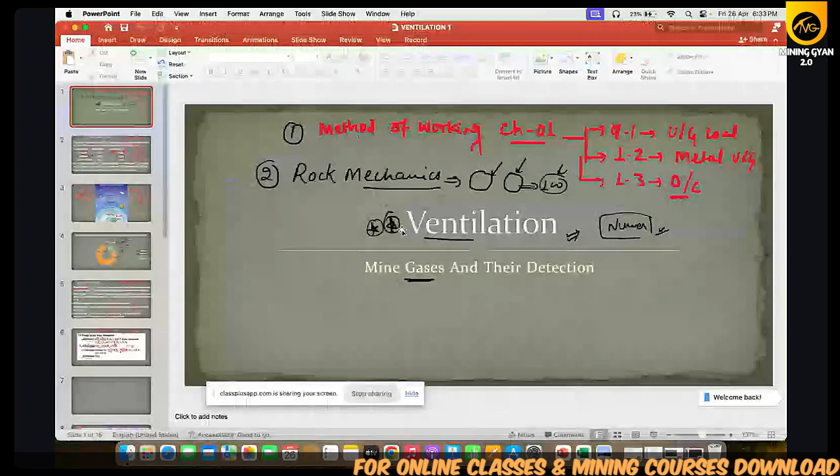So yesterday we were discussing. We have started the mine ventilation, and we have discussed the atmospheric oxygen, nitrogen, and carbon dioxide percentage in the environment. Then we have seen the layers of the atmosphere, which is the troposphere, stratosphere, mesosphere, thermosphere, and exosphere. Then we have discussed the black damp, fire damp, white damp, stink damp, and after damp.

So for white damp, that means CO. Stink damp means H2S. Fire damp means the percentage of CH4 will be more. Black damp is also known as the choke damp. The percentage which is important: fire damp percentage of CH4 will be 80 to 96%, and N2 is 10 to 20%. Black damp N2 percentage is 87 and CO2 is 13%. After damp N2 is 44 to 58 and residual is 30 to 50.

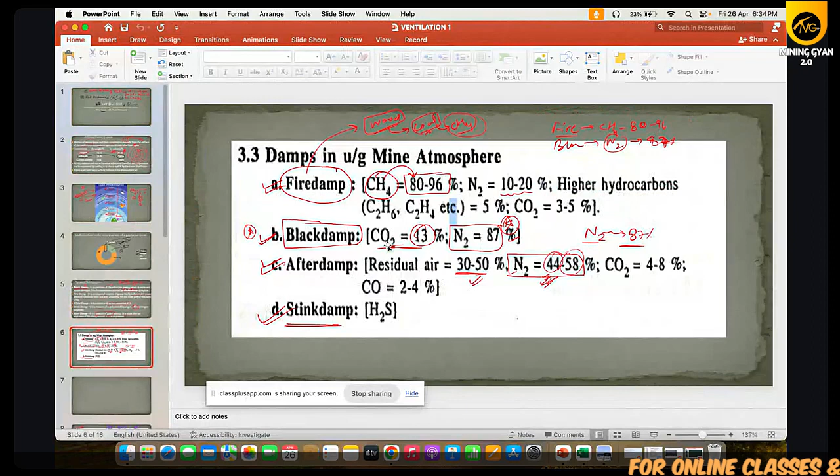Stink damp is H2S. Then we have seen whatever permissible concentration of different gases in Indian underground mines, CH4, we have discussed that in the general body, the percentage of CH4 is 0.75. And in any part of the mines, it will be lesser than 1.25%.

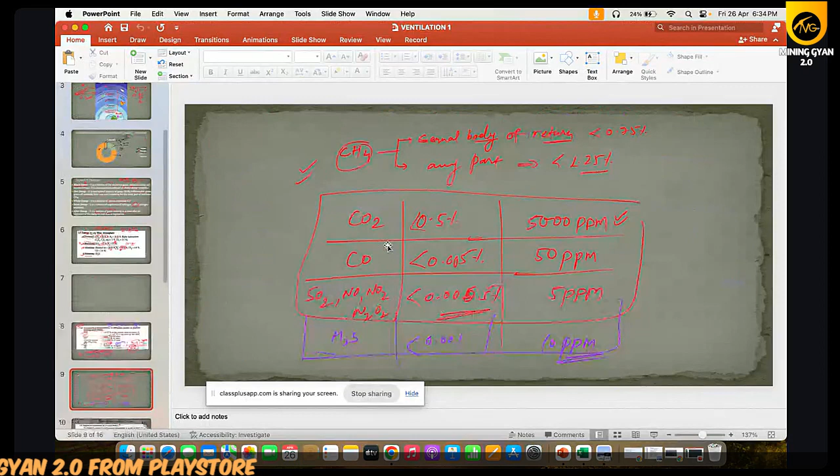CH4, CO, and NO2, N2O4, and SO2, we have seen various permissible percentages. CO2 5000 ppm, CO 50 ppm, SO2, NO2, N2O4 we have seen 5 ppm, and H2S will be 10 ppm. This is the permissible limit in the underground mines.

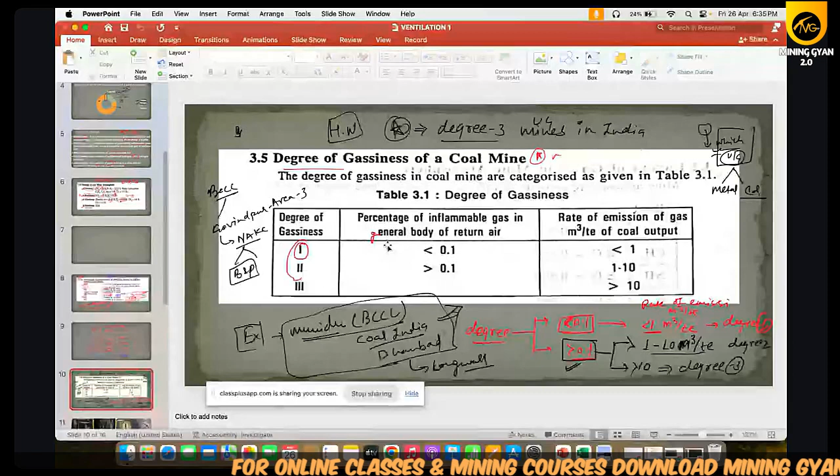Then we have seen the degree of gasiness: degree 1, degree 2, degree 3. We have divided on the basis of percentage of inflammable gas in the general body. If it is less than 0.1 and the rate of emission is also less than 1, then we call it degree 1. Or if the percentage of inflammable gas in the general body of the return is more than 0.1, then we divide into two types, degree 2 and degree 3.

We call it degree 2 when the rate of emission is 1 to 10. And if the percentage of inflammable gas in general body is more than 0.1, but the rate of emission is more than 10, then we call it degree 3.

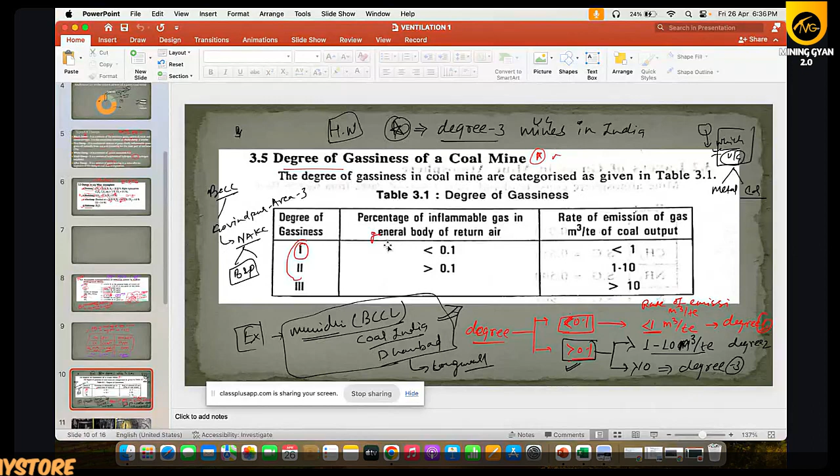Then we have seen PV equal to nRT. If T is constant, or temperature is constant, we call it Boyle's law. In other terms, P is inversely proportional to volume. Or in Charles's law, we consider pressure is constant. So volume is directly proportional to temperature, that means V1 by T1 equal to V2 by T2.

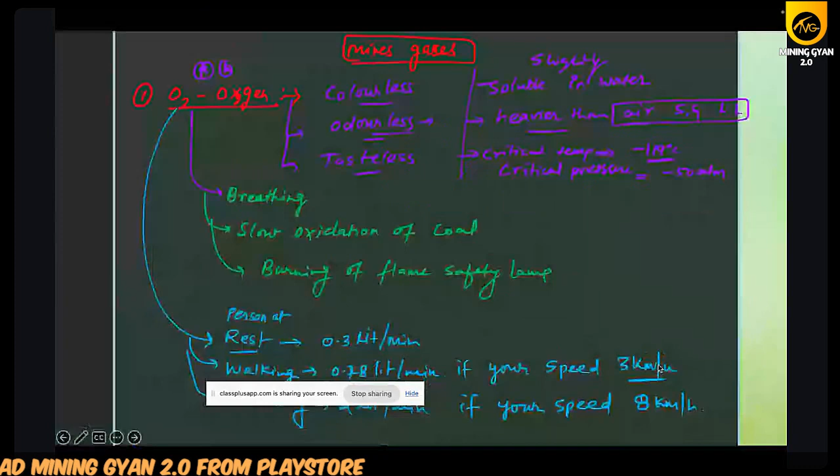Then we have started that there are various types of gas. I thought I should discuss a little bit about these gases, because in AK Gorai they have mentioned only the names. So I thought I will give you some basic idea in a little more detail, so that if any theory question comes based on gas, you are able to solve that question also.

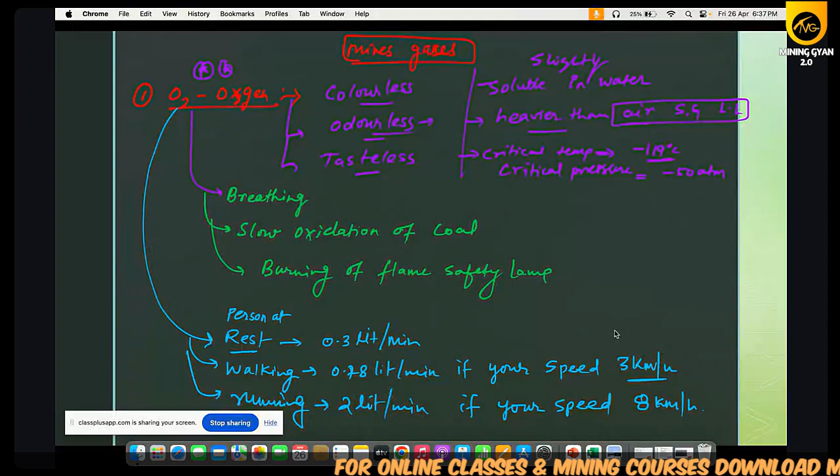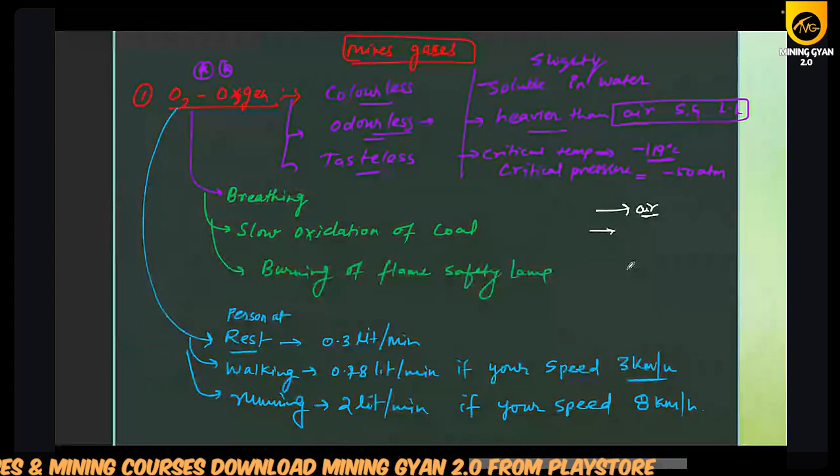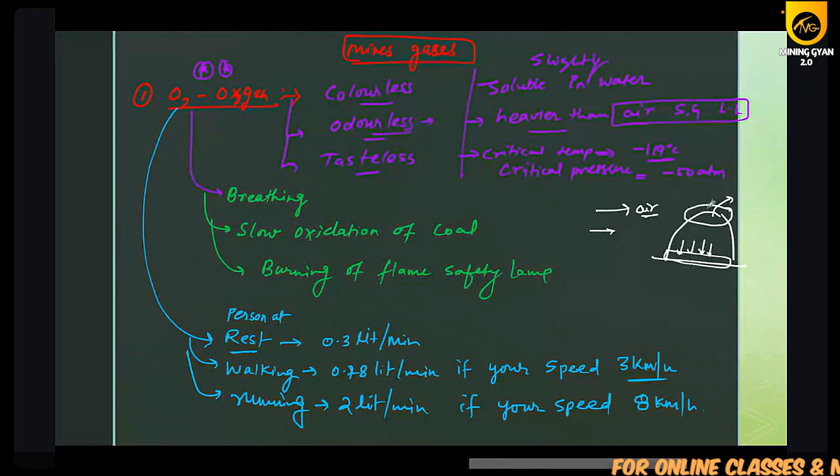So oxygen, we have seen that oxygen is colorless, odorless, tasteless. It is partially soluble in water, and has higher density than the air. Higher than the air means, if you see in the atmosphere, air is here, O2 will be below, heavier than air. So if this is your heading, heavier gases will be found near your floor, and lighter gases will be found on the top, on the roof. So CH4 you will find on the roof side because it is lighter than air.

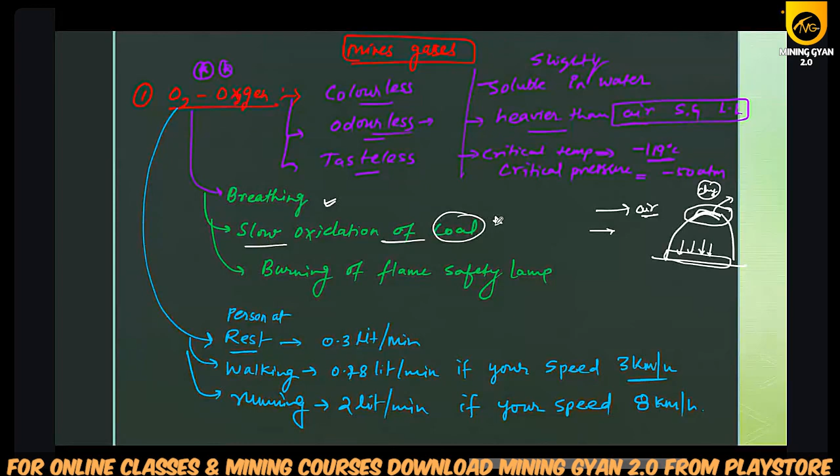So O2 we use for breathing, and it's also important for the slow oxidation of coal, and burning of the flame safety lamp. Then we have seen, if a person is at rest, he needs only 0.3 liter per minute. But if he is walking, then he needs 0.78 liter per minute. And if he is running, then he will need 2 liters per minute.

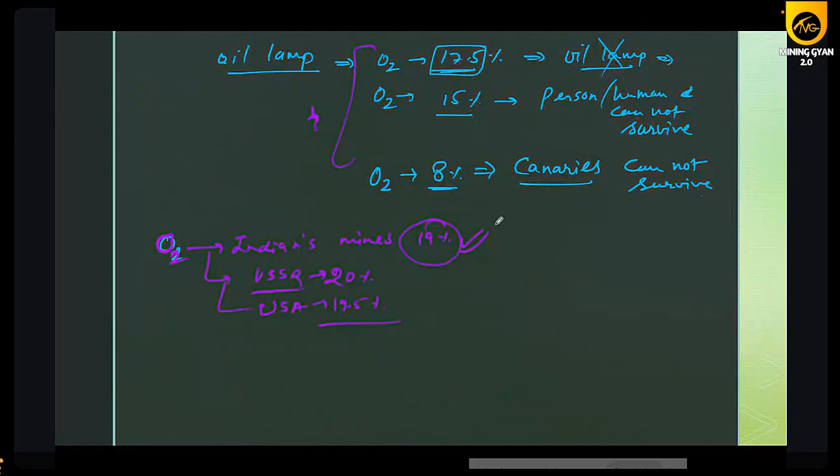Then we have seen the oil lamps. If the oxygen level is 17.5%, the oil lamp will be shut off. If the oxygen level decreases to 15%, a person cannot survive. And if the oxygen level reaches 8%, a canary bird cannot survive.

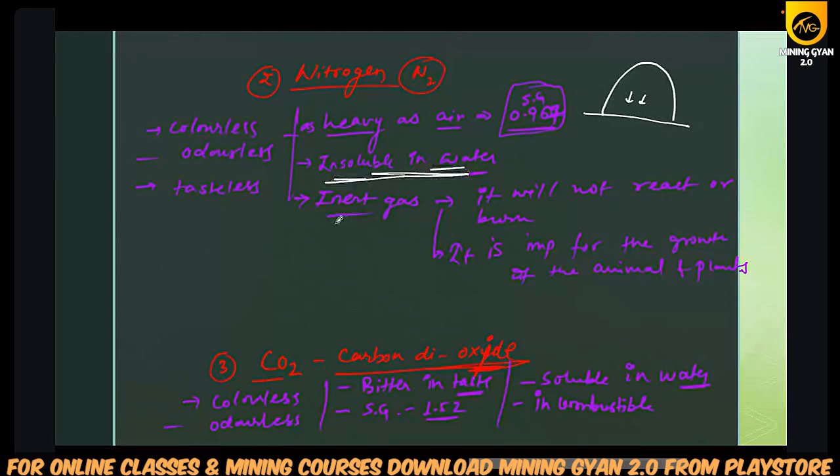Then we have seen nitrogen. Nitrogen is colorless, odorless, tasteless, and as heavy as air. That means you will find it in the bottom side, not on the top side, in your heading. It is insoluble in water. It is an inert gas, meaning it will not react or burn. It is important for the growth of plants and animals.

Then we have seen carbon dioxide. Carbon dioxide is colorless, odorless, but it has a taste, a bitter taste. Its specific gravity is 1.52, that means heavier than air, and it is soluble in water. So please remember that.

CO2 is produced due to breathing of man, burning of flame safety lamp, decay of timber, slow oxidation of coal, and diesel locomotives. So during breathing, when you inhale you take in oxygen, and when you exhale you release CO2.

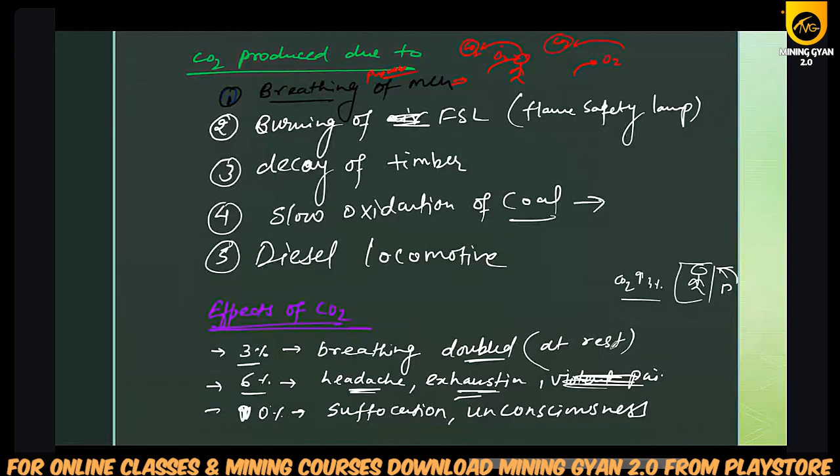Effect of CO2: if the CO2 percentage is 3%, you will breathe faster, meaning breathing doubles at rest. If the percentage increases to 6%, you will feel headache and exhausted. If it further increases to 10%, there will be suffocation and unconsciousness. And if it increases to 25%, you will die within 1 hour.

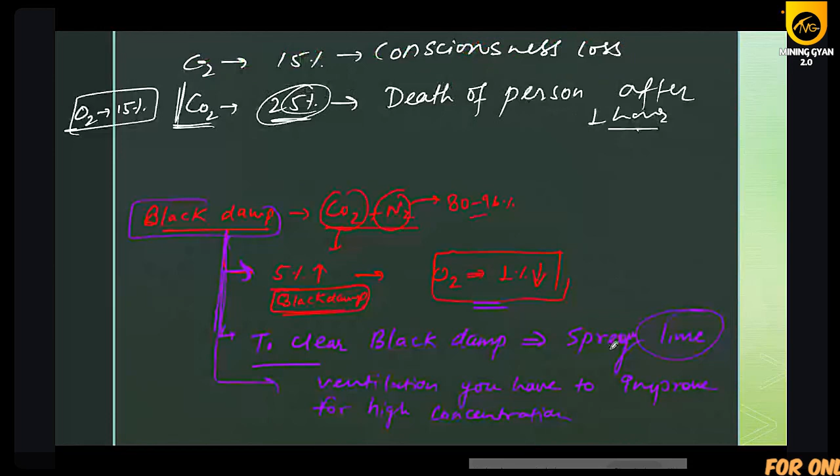Then we have seen details of black damp. Black damp is made up of CO2 and N2, and to clear the black damp, you have to spray lime and improve your ventilation.

Then we have seen carbon monoxide. We call carbon monoxide the white damp. Remember that fact. It is colorless, odorless, tasteless. Its specific gravity is nearly that of air, and it is hardly soluble in water. It burns with a light blue flame.

CO is produced due to oxidation of coal, explosives in underground mines, spontaneous combustion, and methane.

Physiological effects: at 0.02% there is headache, discomfort, and collapse after 45 minutes. If the percentage increases to 0.12%, heartbeat will increase. If it increases to 0.2%, the person will become unconscious. At 0.5%, death of the person occurs.

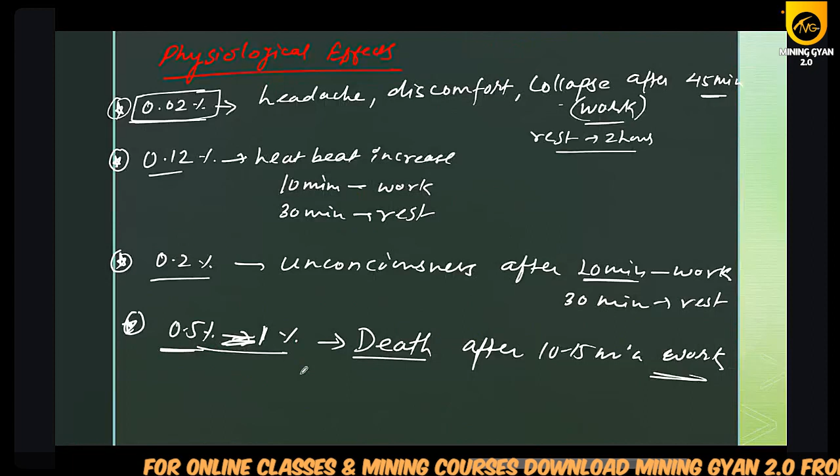Canary bird - till now we have discussed up to this information. If you have any doubt till now, please comment, otherwise we will start.

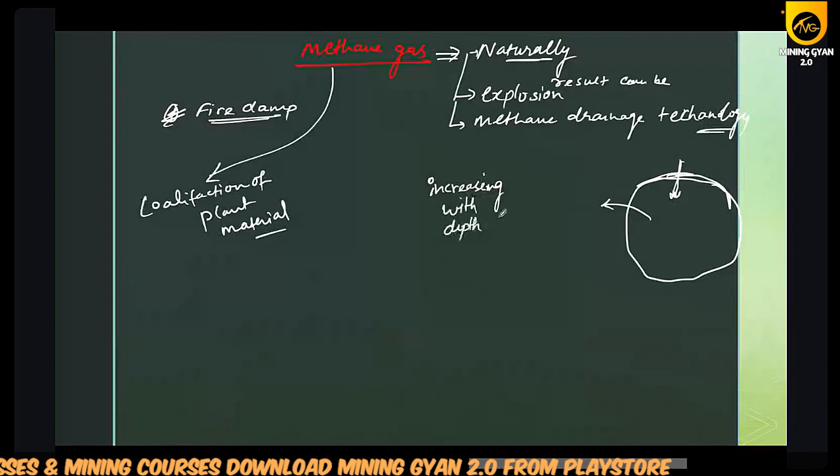If this is the surface of the earth, going from the surface to underground or deep below, with increasing depth, what will happen? The percentage of CH4 will increase.

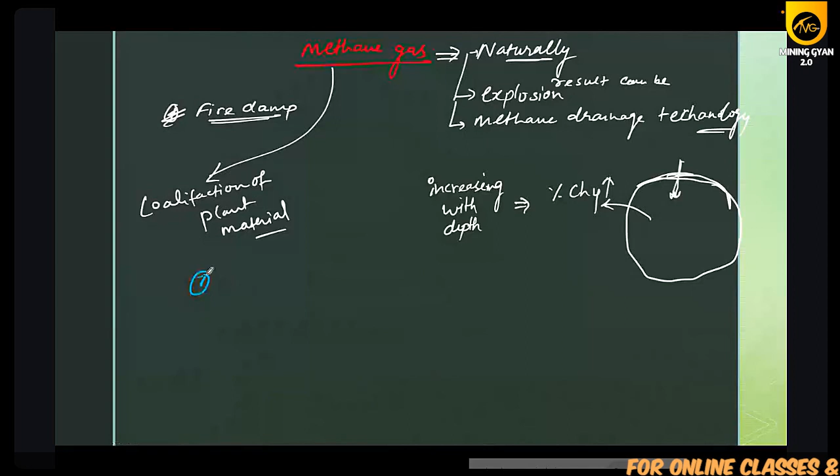Now we have to discuss some properties of methane. First property, it is colorless, it is odorless, as well as tasteless. Second, you also need to know that CH4 or methane is lighter than air.

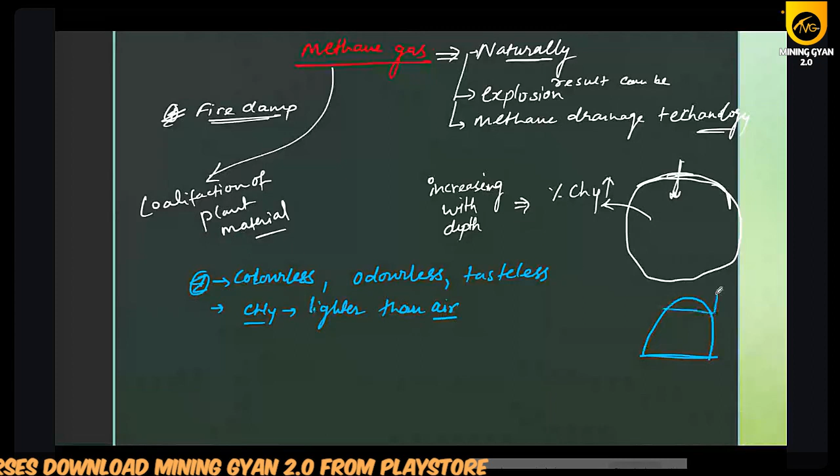Why? What will happen if it is lighter? If this is your heading, then you will find CH4 on the top side, on the roof side, because it is the lighter gas. If you talk about mine workings, on the face, then you will find it near this face side.

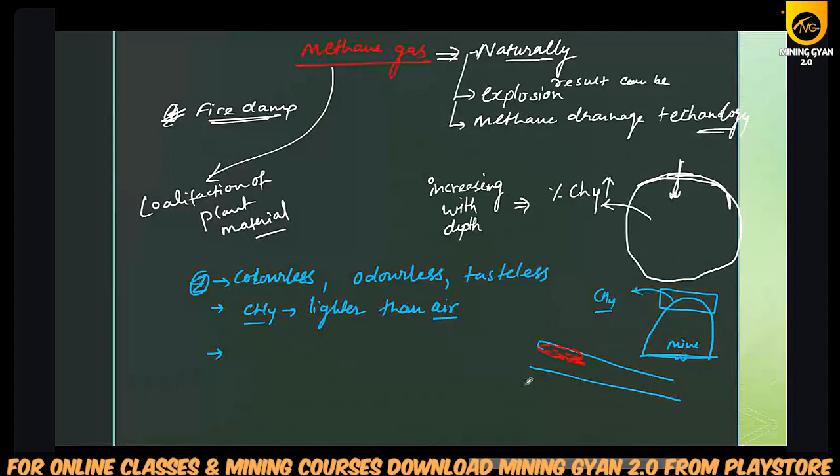CH4 is not a toxic gas, it is not toxic. And as I told you when discussing fire damp, when it burns, it will burn like a blue flame.

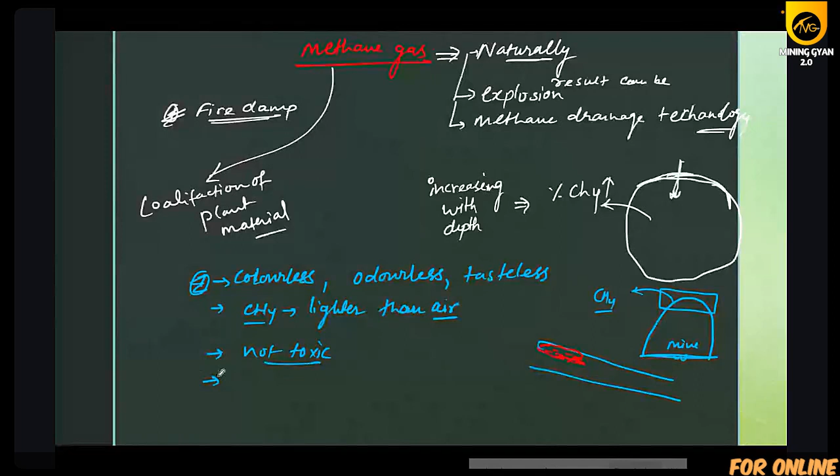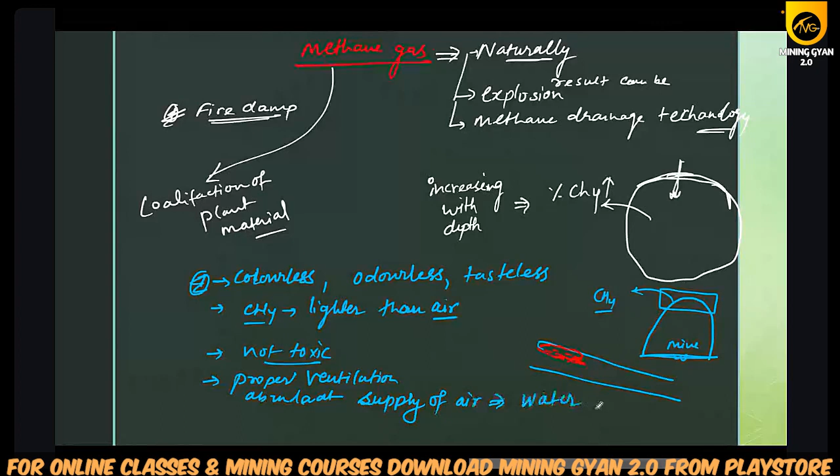So with proper ventilation or abundant supply of air, it produces water and CO2. If you want to see the equation: methane, if we provide oxygen in sufficient quantity, that means 2O2, then it will produce water as well as CO2. Just remember, when methane and oxygen meet in sufficient quantity, it produces water and CO2.

If the supply of air is not sufficient, then it will produce water plus carbon monoxide. Please remember these two facts: when you provide abundant oxygen or air, it will produce carbon dioxide and water. If your air supply is not sufficient, then it will produce carbon monoxide and water.

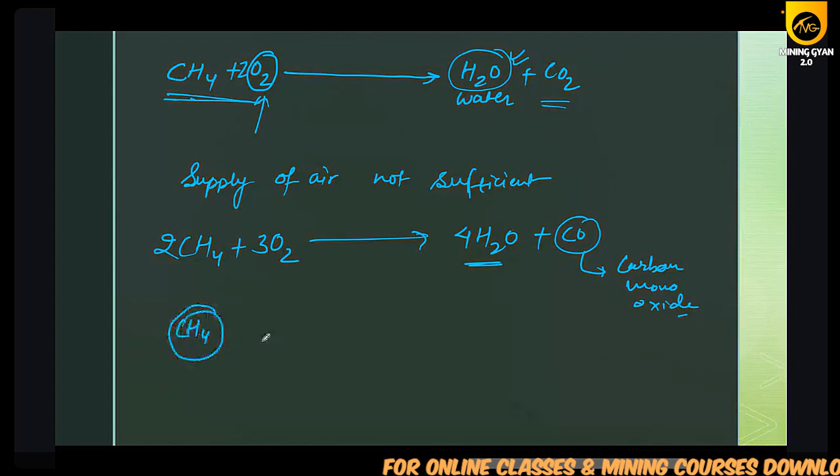And you have to remember CH4's explosive mixture percentage range, like 5.4% to 14.8%. Please remember this fact, it is very important.

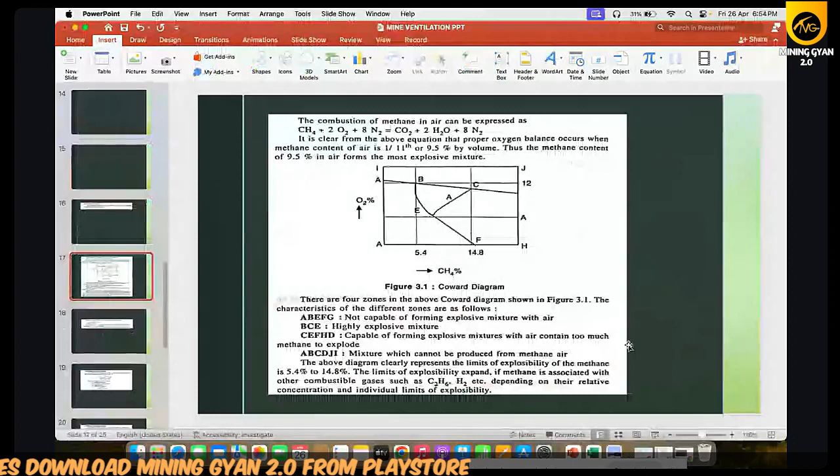So I have a diagram also, we call it the Coward diagram. This diagram indicates the chance of fire damp explosion for different compositions of the methane-air mixture. This limit is 5.4 and this is 14.8.

So this area - you have to watch these facts, because in exams you may be given a CH4 percentage like 12%, and an oxygen percentage like 15%, and asked whether explosion can happen or not. We will see that type of question when we solve numericals or exercises.

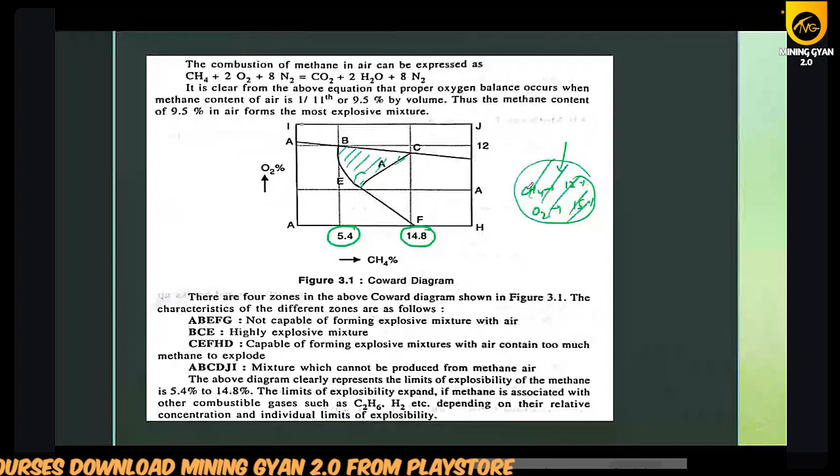Just watch what the diagram has given us - the Coward diagram, figure 3.1, with points A, B, E, F, G. So he is talking about this area - if your percentage, if the cross section lies in this area, if your CH4 and oxygen percentage lie in this area.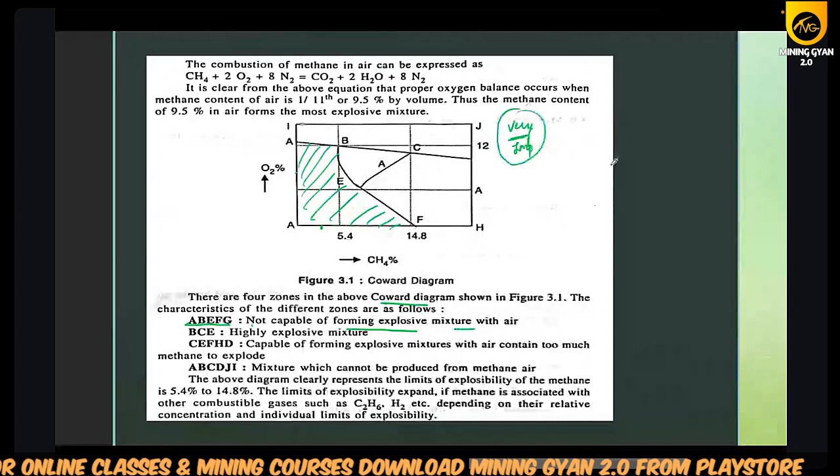Then we call it not capable of forming the explosive mixture. Please remember or revise this graph multiple times, I have seen questions based on this diagram. So if in area A, B, E, F, G, then it will not be capable of forming the explosion mixture with air.

Area B, C, E - if this area, then it's a highly explosive mixture. If your percentage cross section comes here, it will be highly explosive.

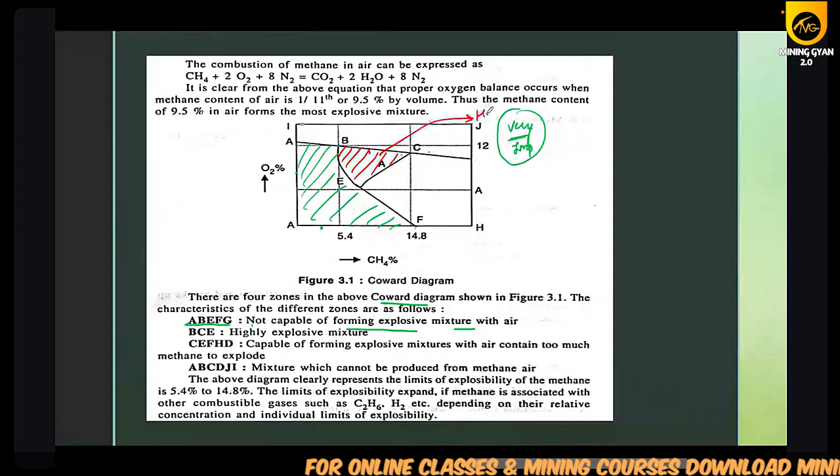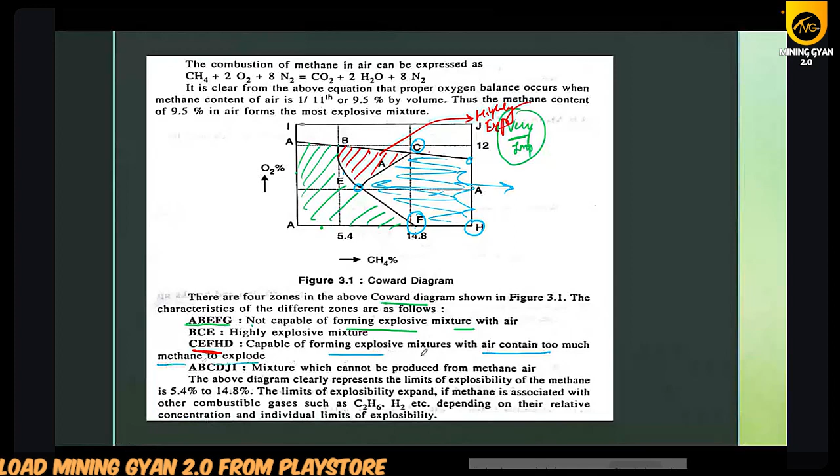And the area C, E, F, H, D - if in this area, that means it is capable of forming an explosive mixture with air, containing too much methane to explode. Understand? In this area it's capable of forming the explosive mixture.

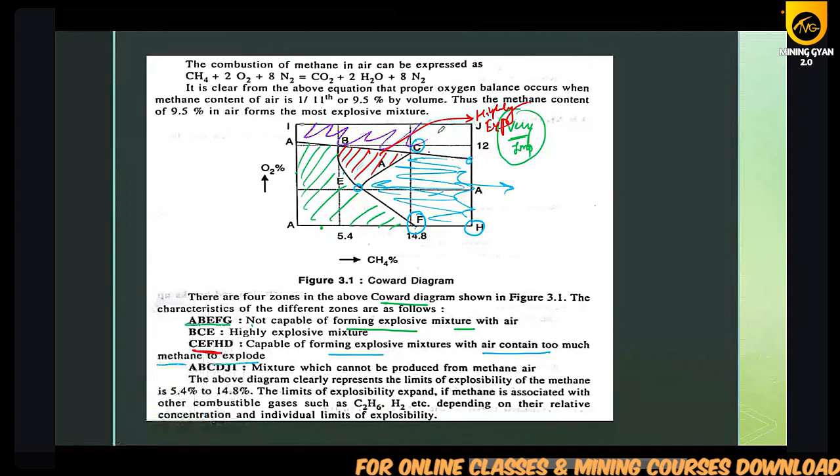And another area is A, B, C, D, J, I, that means the top area, this area - this mixture cannot be produced. So if your cross section lies in this area, it cannot explode.

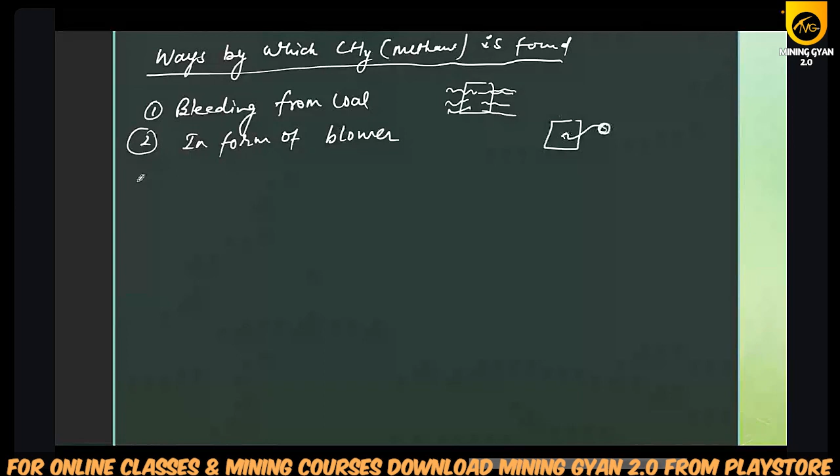Suppose this is your coal, so some bleeding happens here - coal bleeds, meaning it gets released from your strata in the form of a blower. That means if this is your heading with coal, it will be released in the form of a gas outburst.

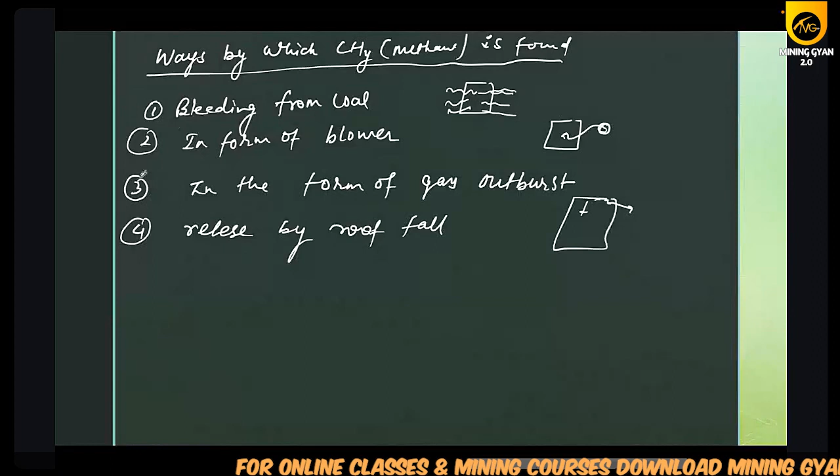And fourth is released by roof fall. So if this is your heading, roof will fall, so some methane trapped from the roof will be released. So that is the way, these are the ways from which your methane can be released.

So which factors affect CH4 gas emission? Nature of coal seam, which type of method of mining you are using, and which speed you are advancing, speed of advancing. Or if the ventilation is proper or not, that will also affect your CH4 gas emission. Please remember, four is the factor you should need.

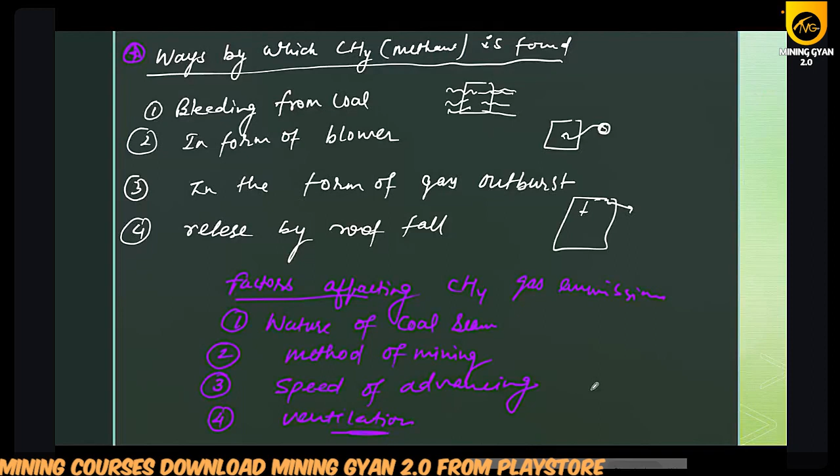Okay, so now we will see methane layer. So methane layers. I think you know about methane layer because you will read in the theory section also. When methane is released, I told you methane is a lighter gas, so it will try to be near your roof. Okay, and if this is your incline, it will stay near the roof here on the rise side.

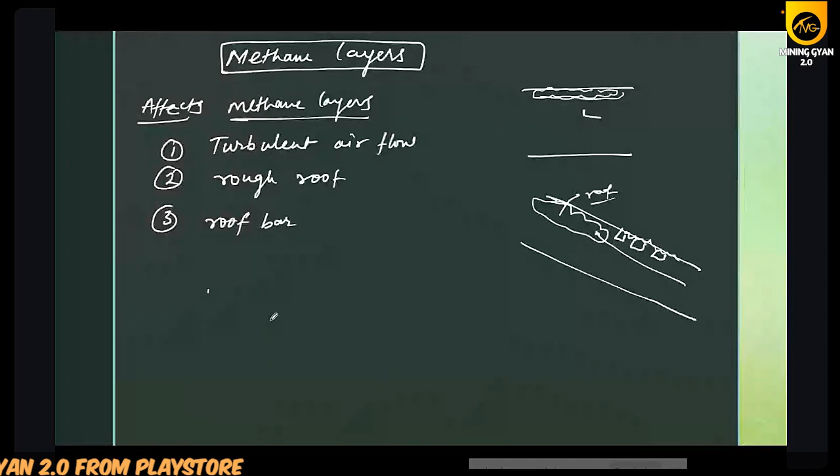So which factors affect methane layer. First factor is turbulent airflow. Second factor, if your roof is rough, so rough roof or roof bars, some bars here. I think you know laminar flow, turbulent flow, that I don't want to explain because then the class will be very lengthy. I'm just giving you the basic information required.

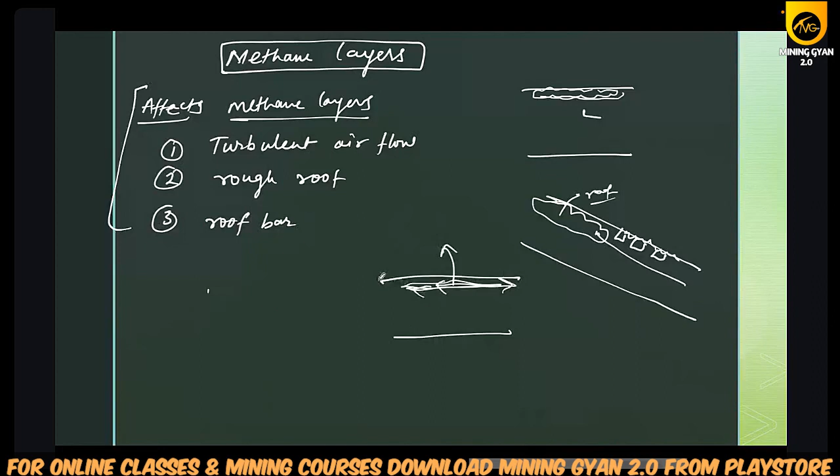So which factors affect the layer of the horizontal airway, if this is the horizontal airway and the methane layer is floating in the air, so it will depend on, suppose it is the source, it will depend on the rate of gas emission, size of airway, and velocity of air.

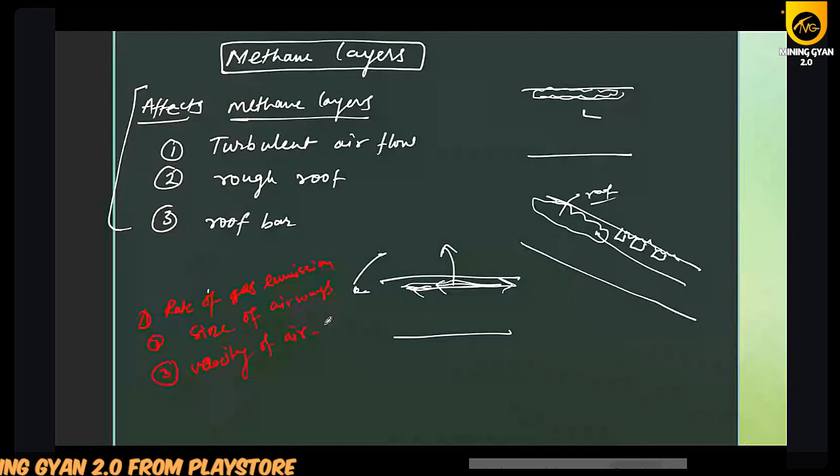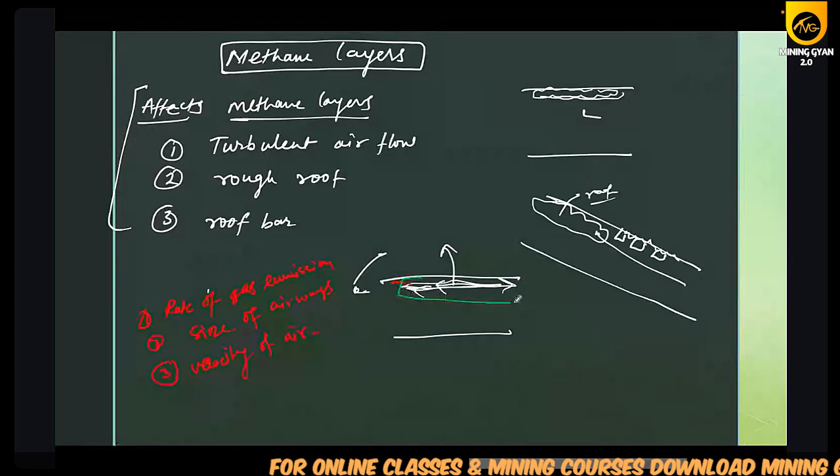So the methane layer happens when the ventilation is insufficient. Because if ventilation was proper, this layer would not form. So if your ventilation is not proper, this layer will not disperse, it will not get removed from here. So if your ventilation is not proper, then the gas will not disperse, due to which the methane layer happens.

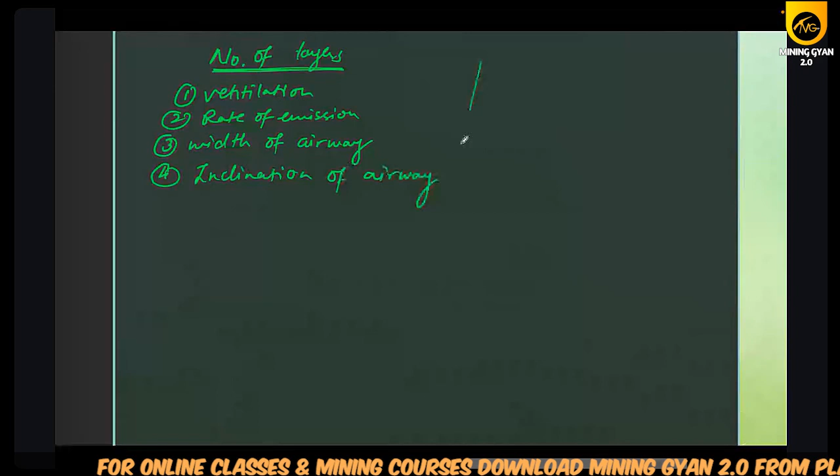Width of airway, inclination of airway, relative density of air and gas, roughness of roof, and type of ventilation. Type of ventilation means ascending or descending.

So I am going a little bit fast. Maybe the speed will be too fast. Please let me know if you are facing any problem.

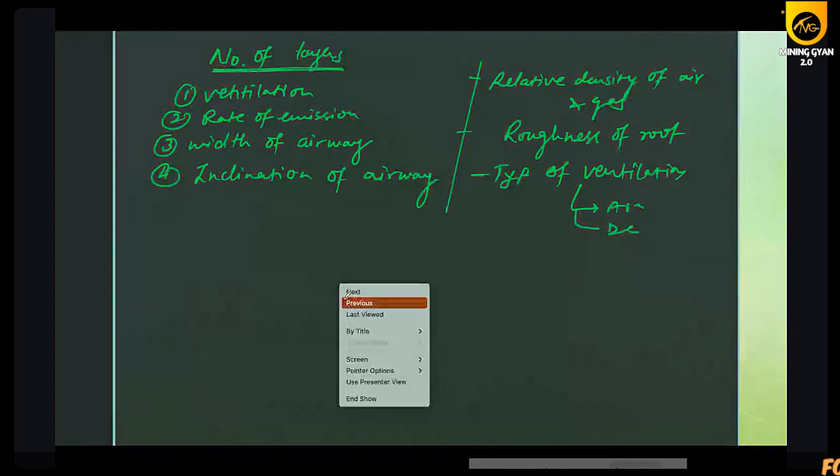What does outburst mean? Where did outburst go? It will blow out. Suppose it is a heading, your gas is trapped here, it will blast and it will come inside your airway. That is outburst. Okay, so we have discussed up to this.

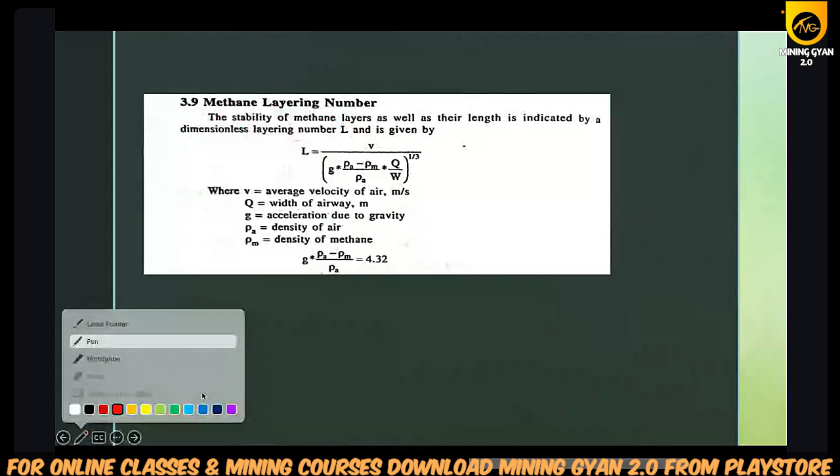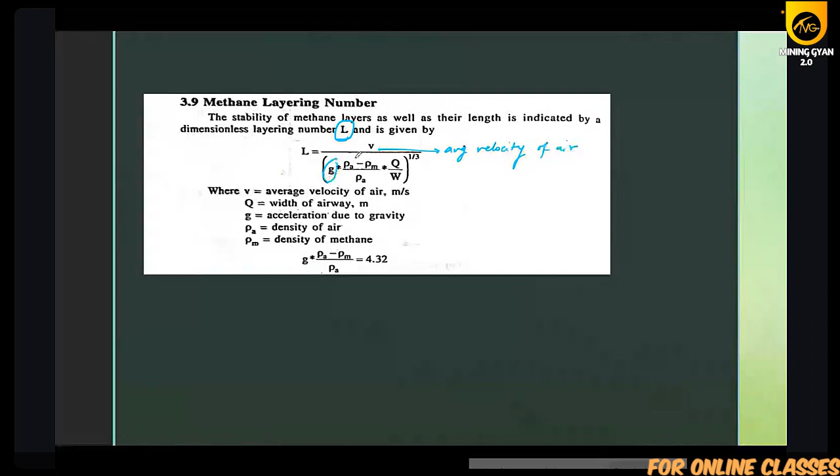So now this formula, methane layering number. Please remember this formula because it is very important. The stability of the methane layer as well as their length is indicated by the dimensionless layering number L. So L equals V, the average velocity of air, and G is the gravity, rho A minus rho m. Rho A is the density of air and rho m is the density of the methane.

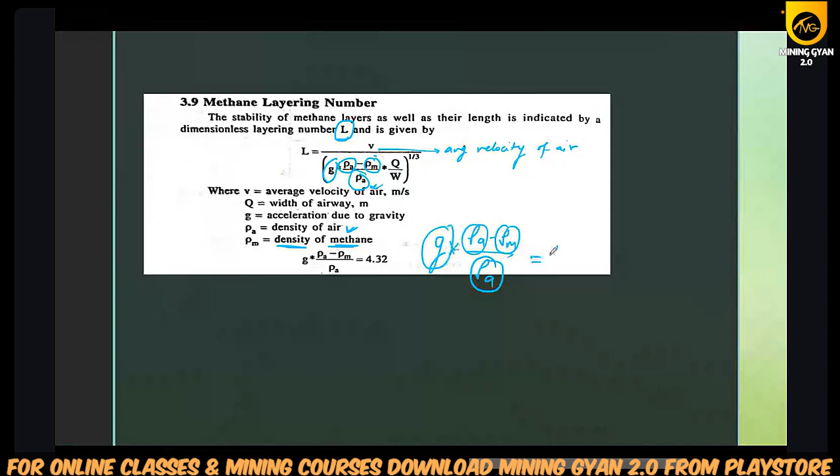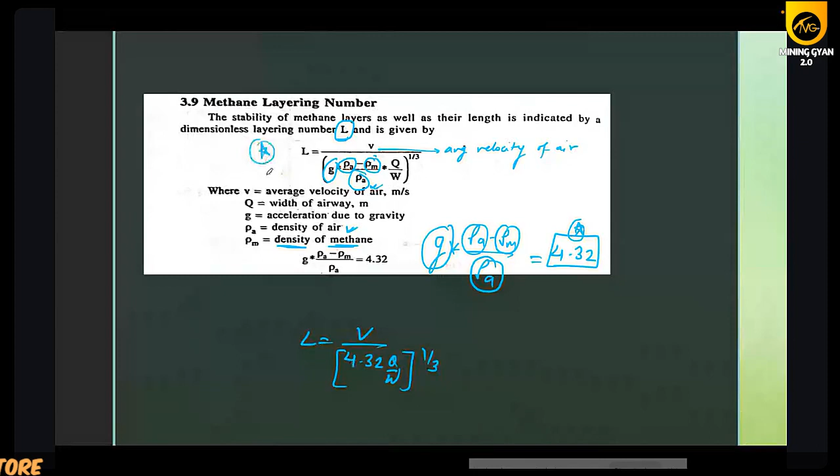Divide by rho A, the density of air, times Q by W. So when we consider G, multiply rho A minus rho m by rho A. So air density, methane density and air density into G, all values we know, so it will be 4.32. Remember this fact. So L, if you want to calculate, it will be V divided by 4.32 times Q by W to the power 1 by 3. Just remember this formula, it will be very helpful for you in the numerical. This is the formula of the methane layering number.

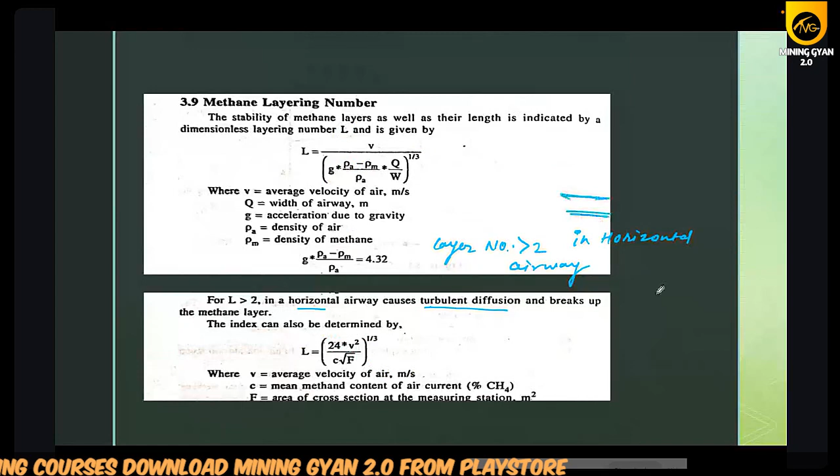When the layer number is greater than 2 in a horizontal airway, you will use turbulent diffusion to break up the methane layer.

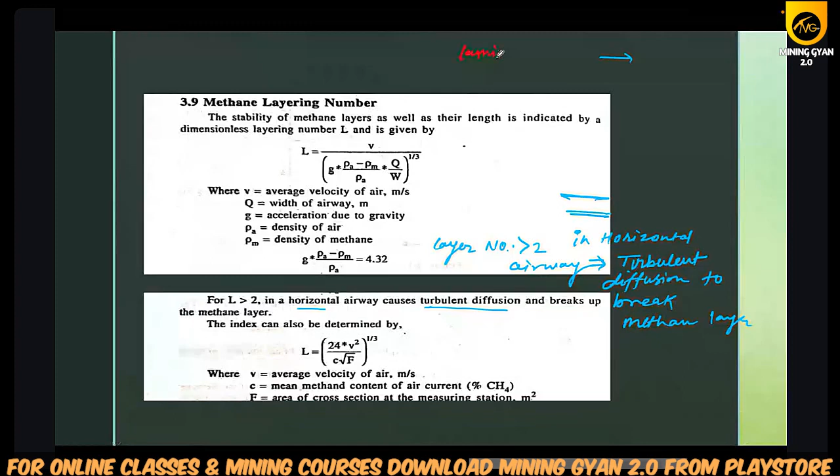Laminar flow, that means I should give you basic information because some of you may not know what laminar flow and turbulent flow are. Laminar flow means flow in a nearly horizontal, straight manner. That is laminar flow.

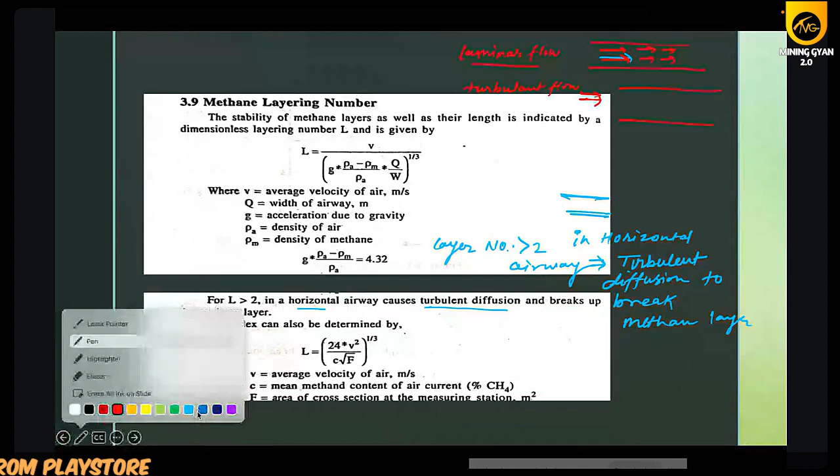And what is turbulent flow? If this is your airway, then it will flow like this in a zigzag formation - that is turbulent flow. So if the methane layer is more than 2, you use turbulent diffusion to break it.

So now we will discuss how you will stop the methane layer, or how you will deal with the methane layer.

First, why is the methane layer forming? Because ventilation is not proper. So you will increase air velocity.

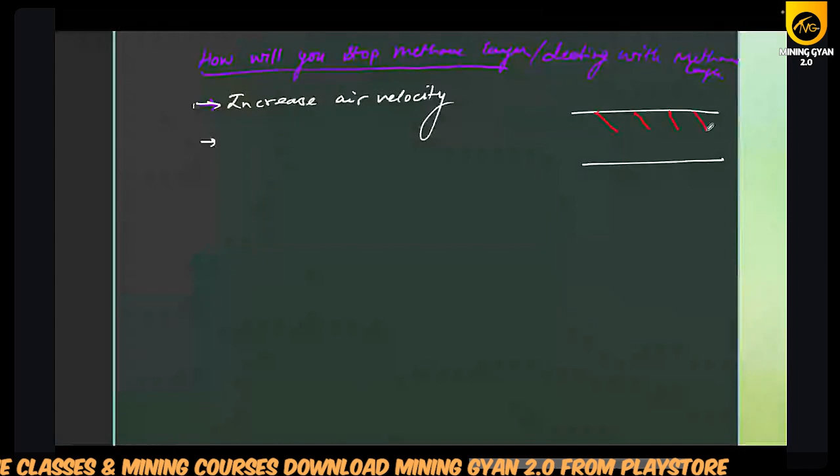Suppose this is your passage, then you will put some incline bar, so when the methane layer is traveling, it will be stopped - it will work as a hurdle. So I can write: use a vertical or incline hurdle sheet near the roof.

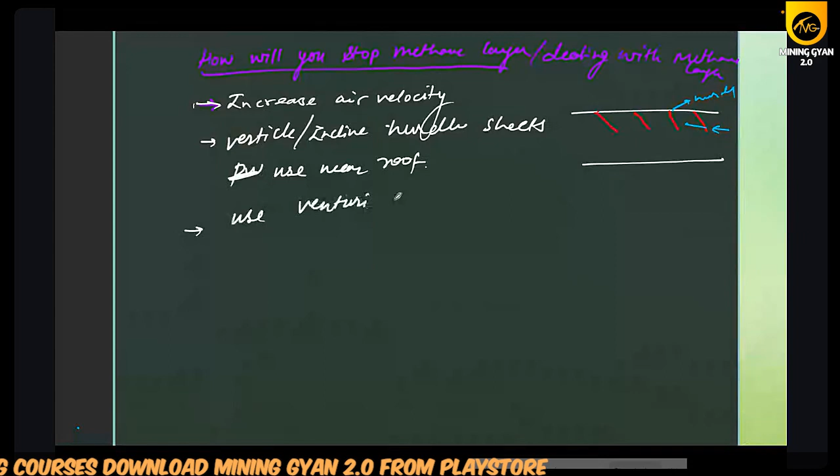Now you can also use venturi blowers. What are venturi blowers? Where compressed air supply is available, they are used for various detection and testing of fire damp.

Detection and testing of fire damp.

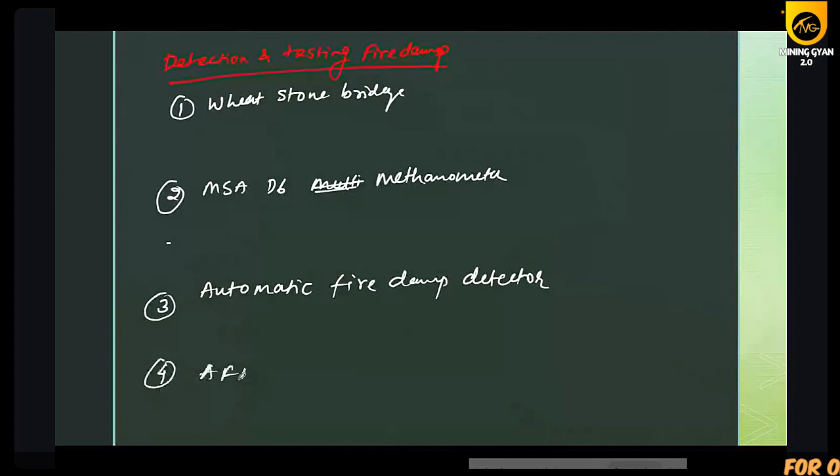First method is Wheatstone Bridge. Second method is MSA D6 methanometer. Third method for detection and testing is the automatic fire damp detector. Fourth will be AFD 2 by Ultron India. And fifth will be interference methanometer.

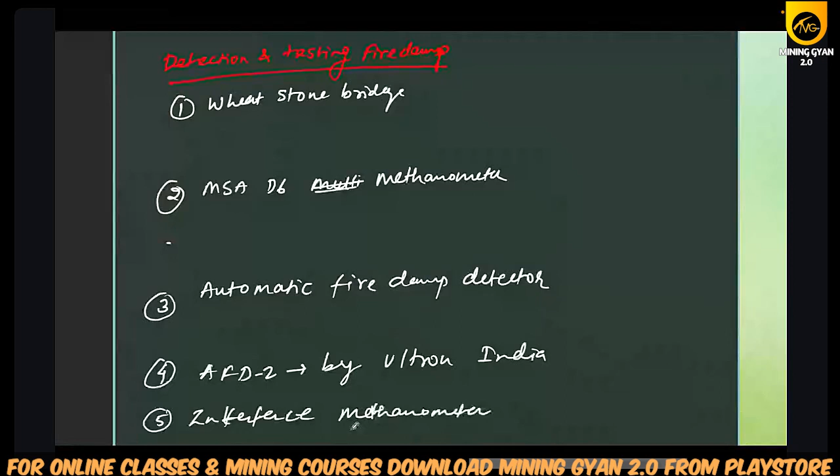Please go and read about this detection and testing of fire damp today, because if I cover all the detail, our course will not finish - I have to cover AK Gorai completely. In AK Gorai, ventilation and mining methods are very big chapters. If I started covering all chapters, it would be like the 4-year degree, 8 semesters you've covered. So I can't complete all the theory - I'm just covering concepts in the category, and topics which I think need basic or detailed information that may be required in numericals or theory sections.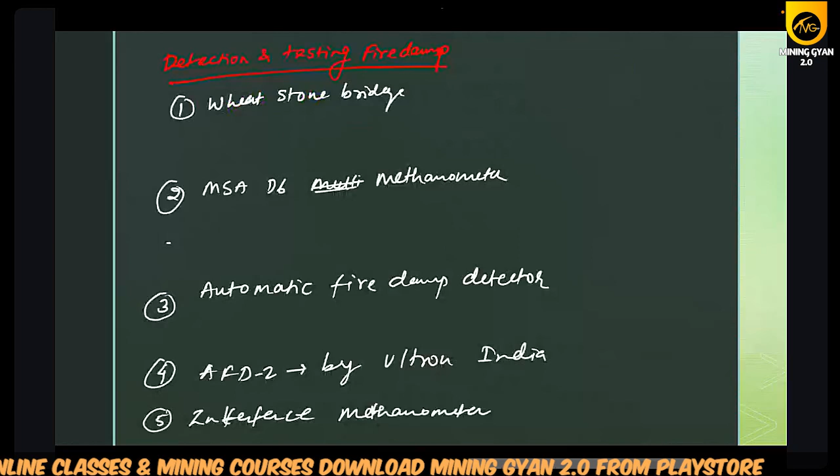Then second was the MSA D6 methanometer. If I have any photo, I will show you - if Google allows us. So please change the pen color, I am changing pens time to time.

This is the methanometer, MSA D6 methanometer. As you can see, this is very short or small, so it can be a handheld device. It is used for the range of 0 to 5 percent.

Third was the automatic fire damp detector. The automatic fire damp detector is also...

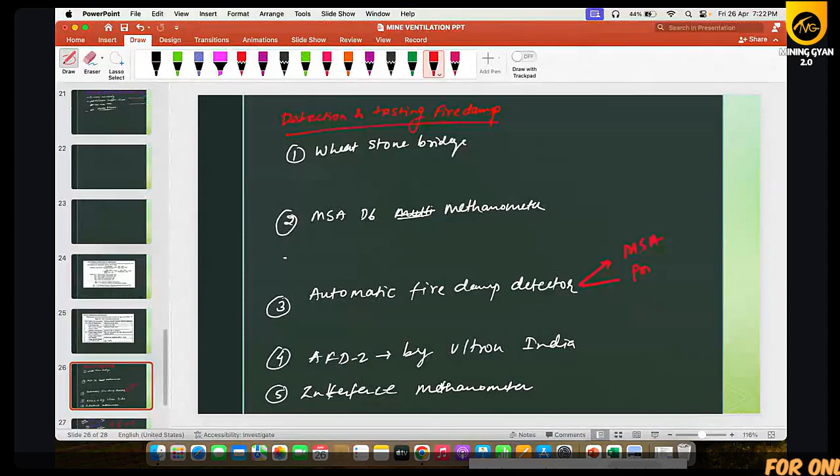MSA is manufactured by MSA. It is also a portable device, with a rechargeable battery that works for nearly 10 hours, like a mobile phone. When you want to use it, it does not have a switch - when you put the battery in, it will start to operate. I think some of you have seen it.

Let me search on Google if a photo is coming up - automatic fire damp detector, there.

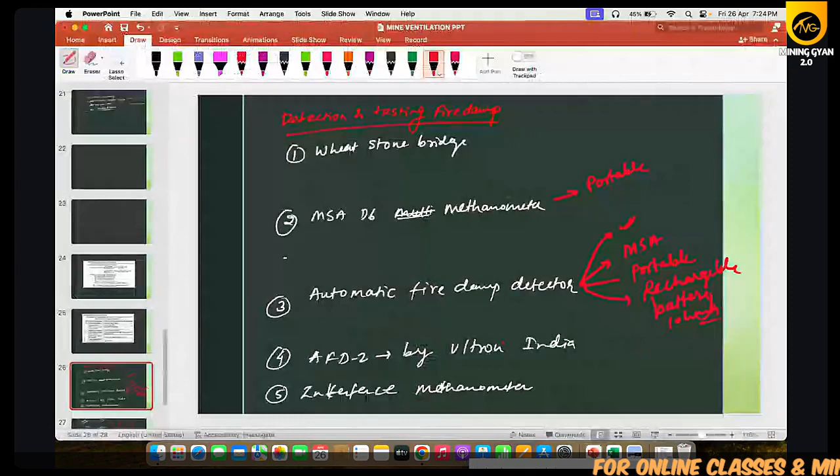This is the automatic fire damp detector, AFD, made by Ultron India. It has display as well as alarm. Methane monitoring range is 0 to 5%. Go and get some detail information. It is also battery operated, and the battery works for 15 hours.

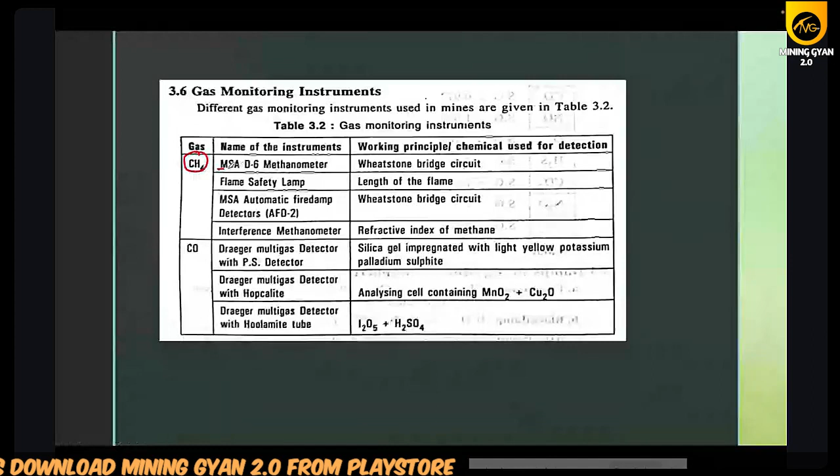Coming to this slide: for CH4, we have seen the MSA D6 methanometer, which uses the Wheatstone bridge circuit principle. Please remember they will ask you which type of instrument uses which type of principle. They can give you four options or a match the column question, so remember that MSA D6 methanometer uses the Wheatstone bridge circuit.

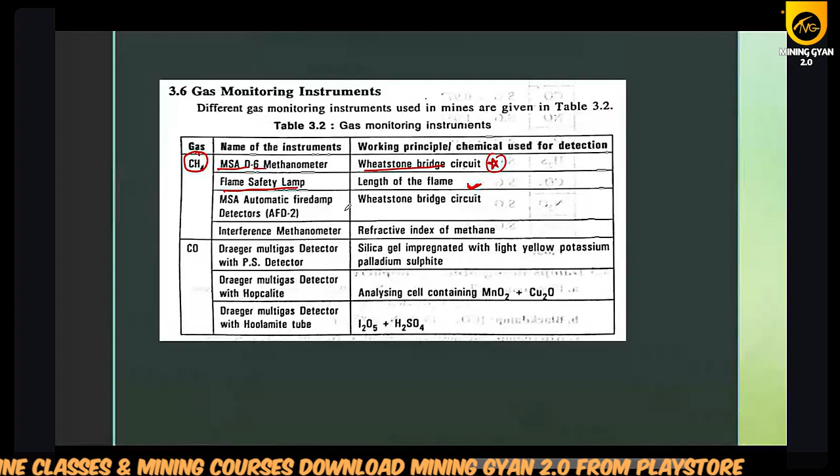Flame safety lamp uses the principle of length of the flame. Everyone should know about it, because if you have a flame safety lamp, you will pass the gas testing certificate. If you have the gas testing certificate, you qualify for second class, and with second class plus required experience, you become eligible for first class. So flame safety lamp works on the principle of length of the flame.

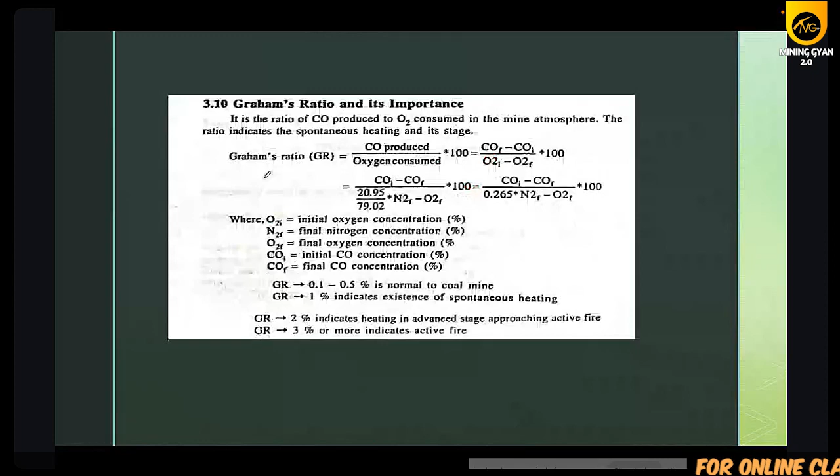MSA automatic fire damp detector, AFD2, is also based on the Wheatstone bridge circuit. Our interference methanometer uses the refractive index principle.

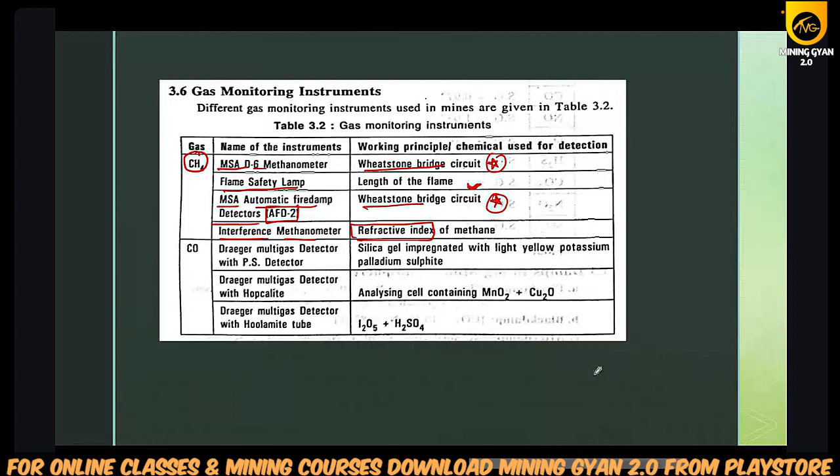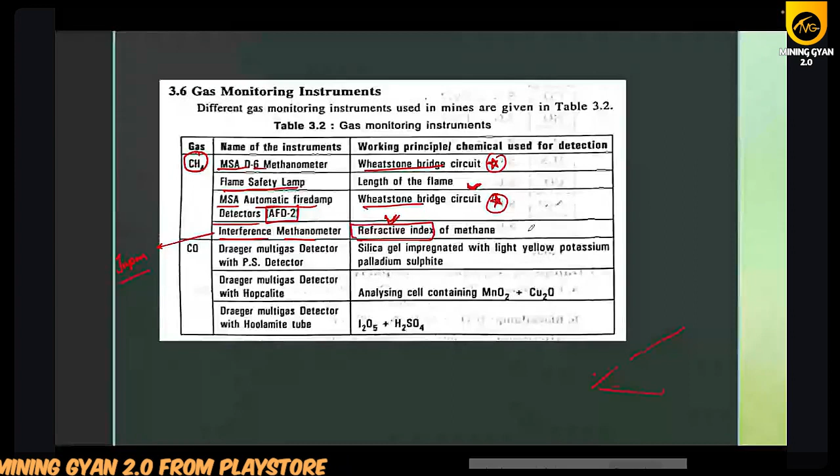So when methane is present, the refractive index will be increased.

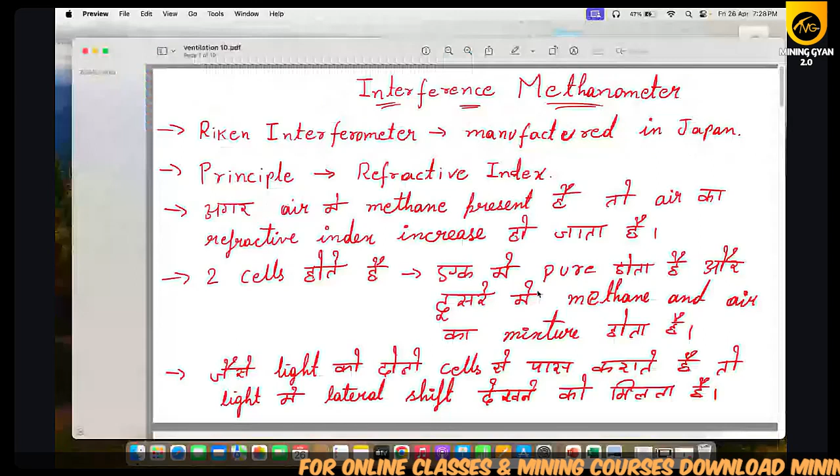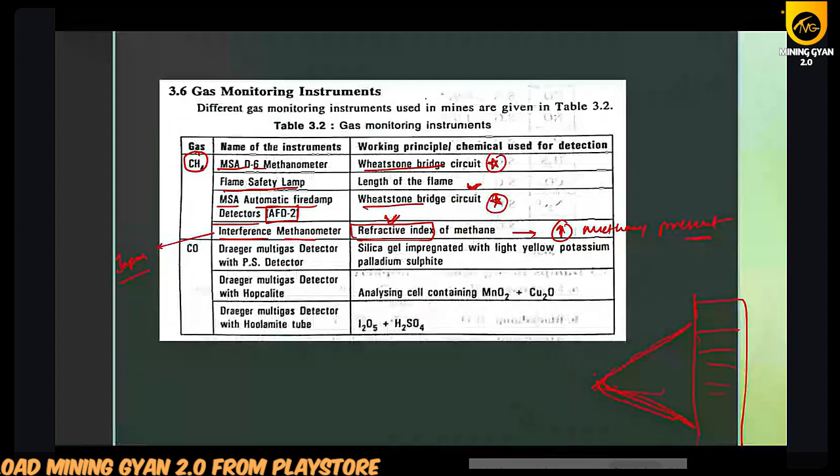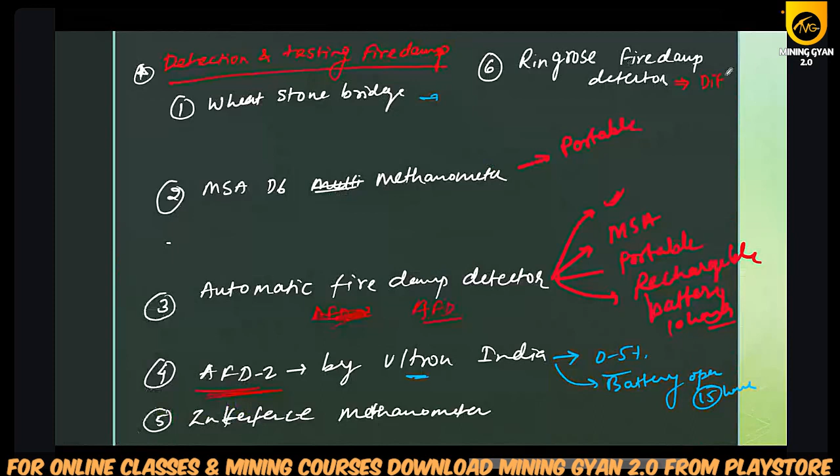One extra thing to remember for CH4: I should write here, Ringrose fire damp detector. Please remember these six names, which will help you in the examination, because you need to know the detection and testing methods for fire damp. The Ringrose fire damp detector uses the principle of DCC - diffusion, combustion, contraction.

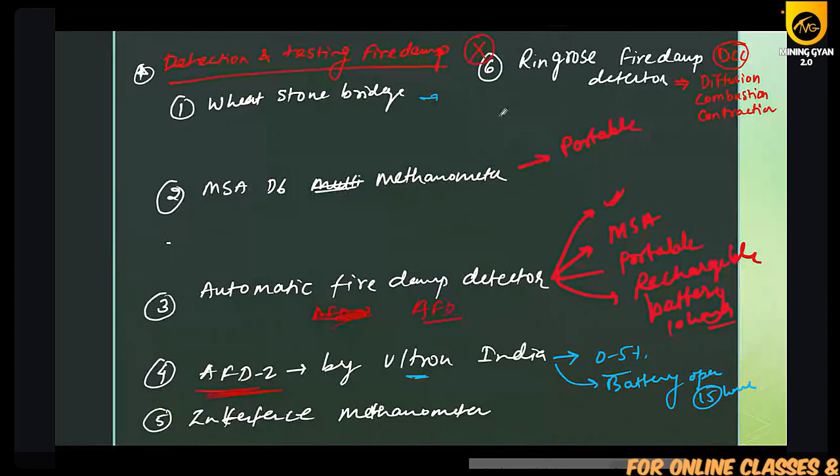We don't use the Ringrose fire damp detector in India, because its flame component is not available in India - we would have to source it from outside India.